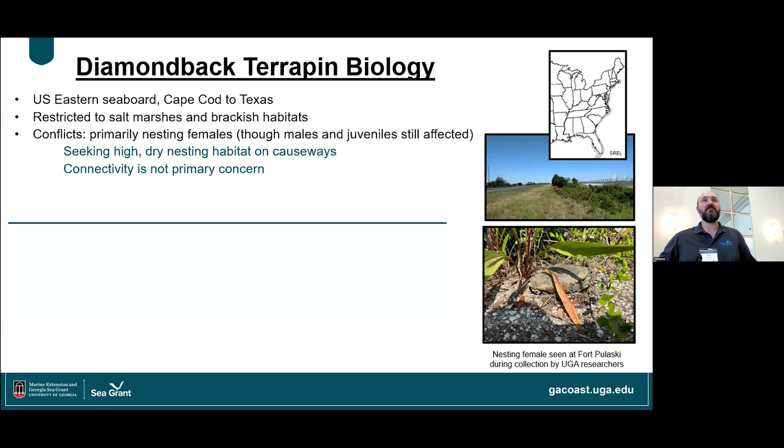So connectivity is not really the concern in this particular case. It's a case study on the Tybee Island Causeway. Because we've got bridges on either end that they can cross, it's really about coming up for nesting. And it's really just during a certain time of the season. So it just gives us a target of where we need to apply potential minimization measures, and really around that diurnal high tide, 3 hours either side of that.

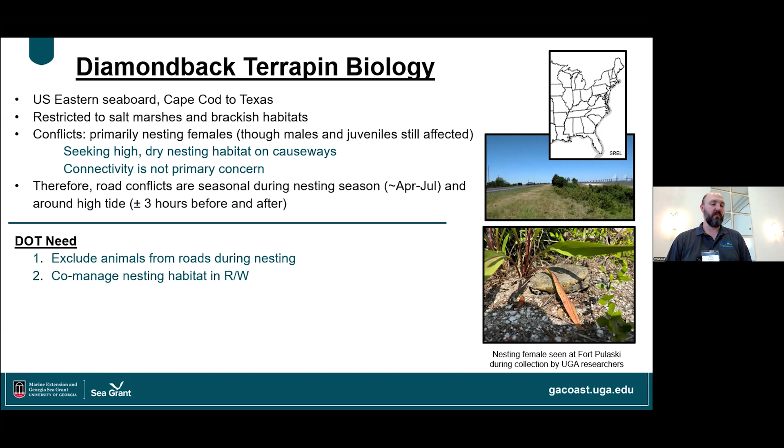So we as a DOT needed to be able to exclude those animals from the roadway, but we also didn't want to lose nesting habitat, which is really critical for that species' survival. So we were looking for a solution and looking for a specific barrier that would meet our needs.

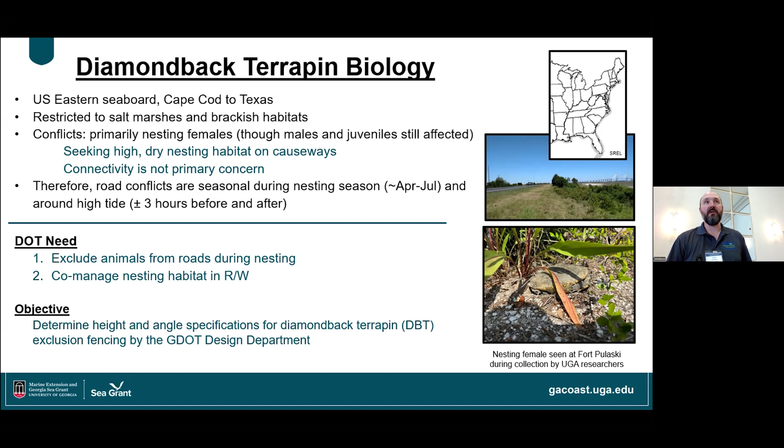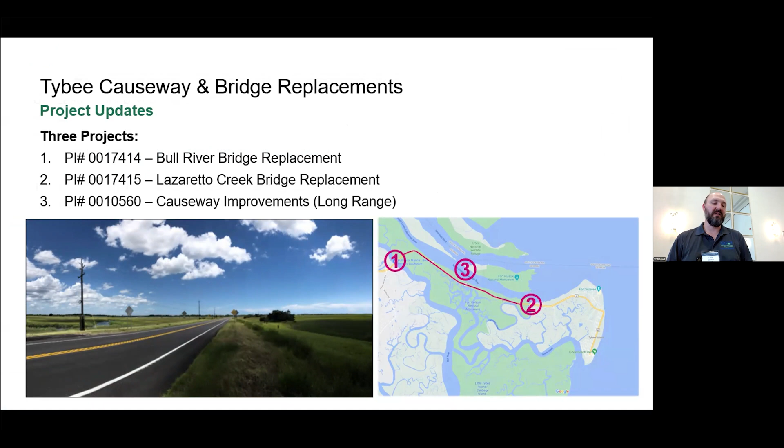There's three main projects that I mentioned. There's the causeway in the middle, but then there's a bridge on either end, and we're advancing those bridge projects right now, which is good because those are a couple of the hotspots that were identified. We had a lot of research that had been done by the Tybee Island Marine Science Center, and so we knew where some of the hotspots were, and it's really a data set that I think is over 10 years old.

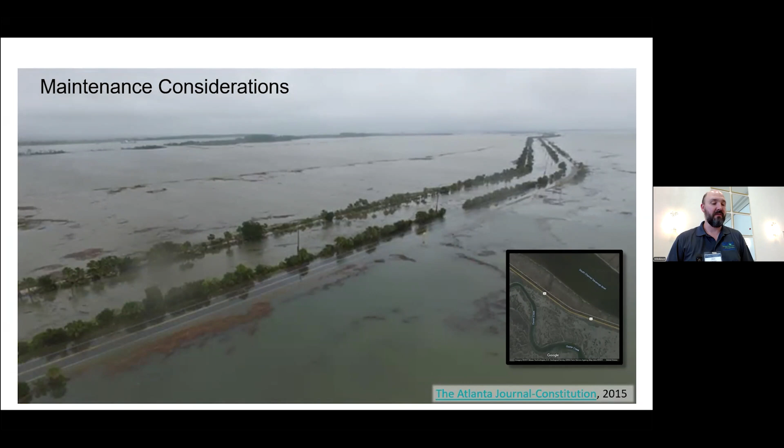There are some maintenance considerations, though. Tybee Island Causeway is very low lying, and so it floods frequently. And when you get rack from the marsh and everything up on the roads, if you had any traditional fence type, then you've got all that rack that's trapped now inside the right of way. And that was a major maintenance concern. And so they really didn't want to do that when we talked to our district office, who would be doing that maintenance, which led us to try to create another solution.

I mentioned the bridges, and so we thought, hey, could we just attach something to the guardrail? That could be great. And we talked to our design policy folks, and they said, you really can't do that because it hasn't been tested, but you can put something 4 feet behind it. And so we started looking for barriers that we could put behind it that would not have those maintenance concerns, that would meet those clear zone requirements that we had. And we also wanted to look at some other mitigation measures.

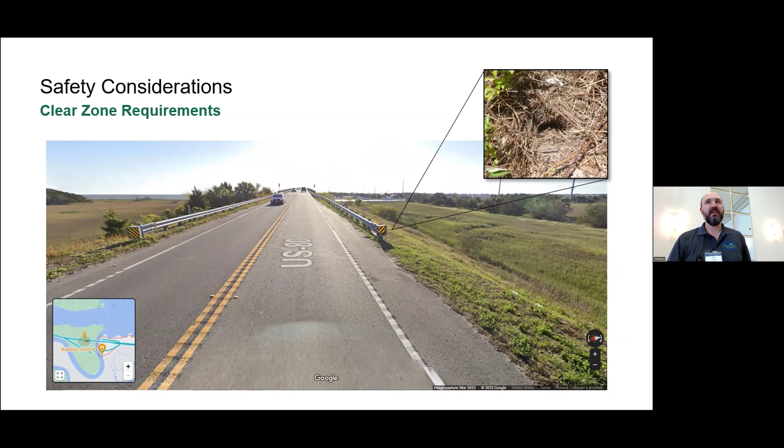So we talked about signage. There were some kind of static signs out there, and I think we've seen research that says that those are not super effective. Some other places have lights that only light up during certain times. But actually, a few years ago on the Tybee Island Causeway, we installed these changeable message signs. And so during that nesting season, a couple hours either side of that diurnal high tide, a message flashes that says, hey, turtles are on the roadway. And also, please leave space between vehicles, because often it's not the first person that's going to hit the turtle. It's going to be the one right after that.

But I talked about wanting to preserve some of that nesting habitat. With these bridge replacements, it's the only way on and off of the island. You can't really shut down the road. There's no alternative means to get out there. So we're going to be replacing those bridges adjacent to the existing bridges.

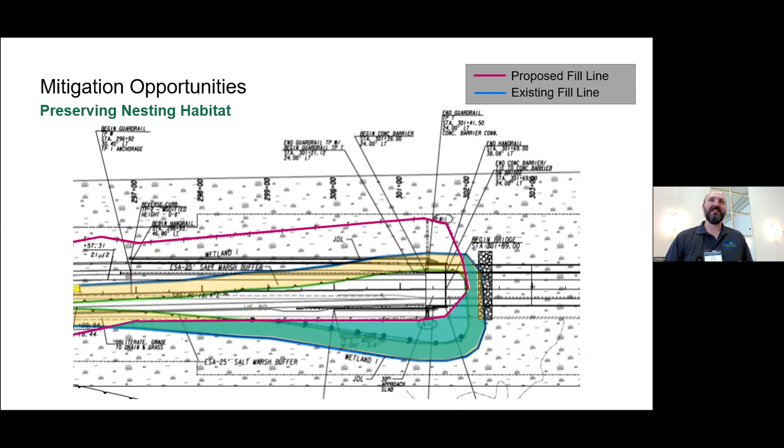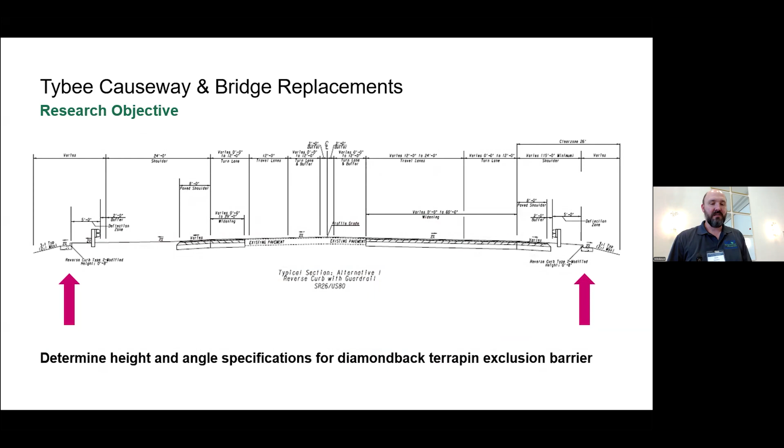And I think that's where I'm bringing you up, Kimberly. And so Kimberly is going to come up and she's going to talk about how we went through that research and some different curb designs that we tested. And by we, I mean her.

Hey, everybody. This was a fun project and a unique opportunity to actually test a design before it was put into place. I'm hoping that that becomes less and less of a unique approach. Chris and I worked together on some ideas. Some of this was pulling from the literature and some other designs from other places that you may recognize, but we were testing a 90 degree with an inward lip that was 3 inches, and then a 70-degree reverse angle curb. And you can see the sections here.

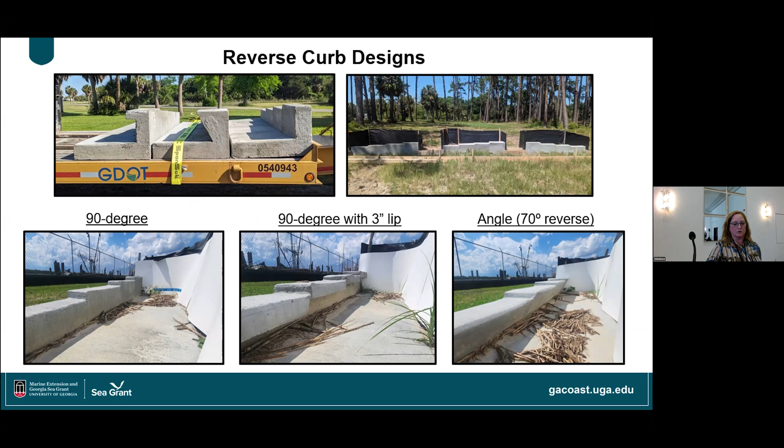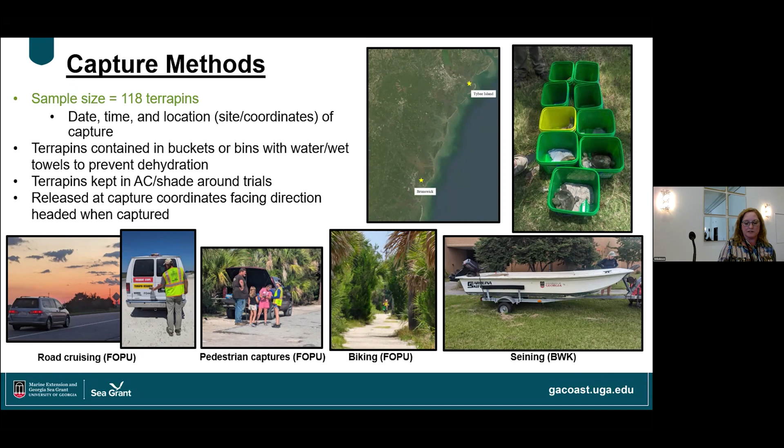We captured 118 terrapins, and we used road cruising. We did pedestrian captures, walking some of the trails around Fort Pulaski. We biked, we seined, and the general gist of this was that we wanted to catch these animals, run them through the experiment, and then have them back in the marsh and released within an hour. This is particularly important because we were capturing gravid females, since they're primarily the ones that are crawling up. We got 118 terrapins overall.

So we had 2 designations, trespass, meaning they successfully climbed over the wall, versus no trespass, where they were not able to get over the wall. We did have 2 considerations for if they trespassed, but that it was assisted. So we had an additional treatment where we added 1 inch of wrack. If they tried 3 times to get over and were not successful, we then added the 1 inch of wrack. Keep in mind that in the real world, when we get wrack wash up during some of these really high tides, it's far more than 1 inch. But we wanted to incorporate this.

Also, terrapins are incredible climbers. They're adapted to climbing over oysters and the high marsh, and so we wanted to note if they were able to use the polywall that we ended up adding to simulate an angled fence that's going to come off of these curbs. And then we randomized the order in which the different curbs and heights were tested.

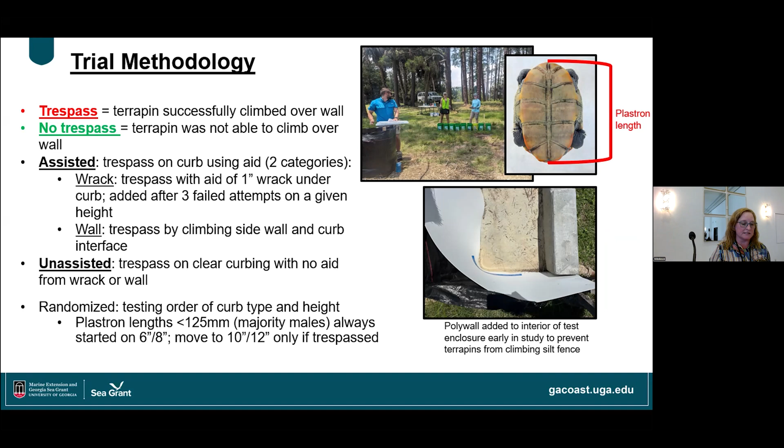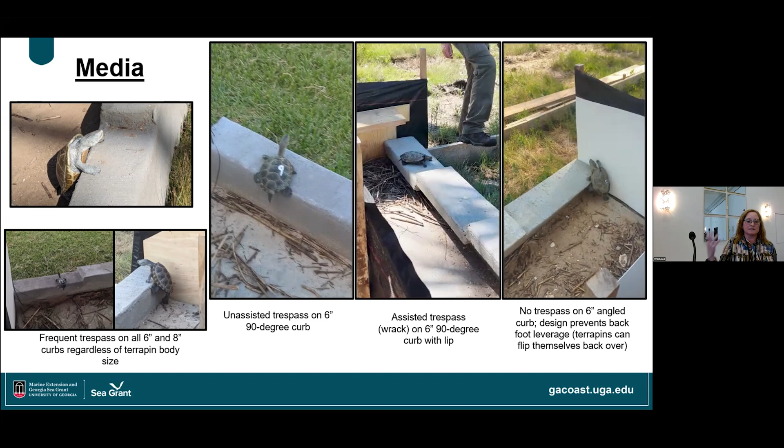Okay, so these are some examples of the video. I'm super excited that they're working so far. This is an example of a terrapin crawling over unassisted on the 6 inch. They had no problem with this. This is an example of a terrapin crawling over the lip that had some of the wrack. And then this last example is a terrapin unsuccessfully trying to climb over the angle. And I will say that terrapins can readily flip themselves over. We did not have any animals that were harmed during this.

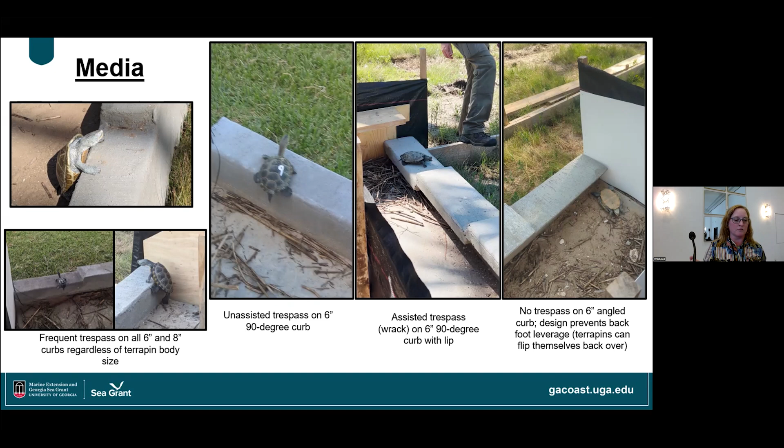And I also want to emphasize this was a test of physiology. We had a very basic runway design, and we were wanting to look at physically what could they climb over, and not trying to simulate real world behavior. All of these curbs were facing the marsh. So in some, we looked at how many attempted to climb over, because as you appreciate well, there's an energetic component there.

So with the 90, we had a lot of animals attempting to get over. With the 90 with the lip, we have fewer attempting. One of the issues with the shorter heights is that they would just go sit under the lip, and on the 6 inch, it was actually problematic for the females because they were tall enough that it was a problem to wedge themselves under. The 70-degree angle, we simply had fewer animals, especially at the higher heights, that were even trying to climb the fence.

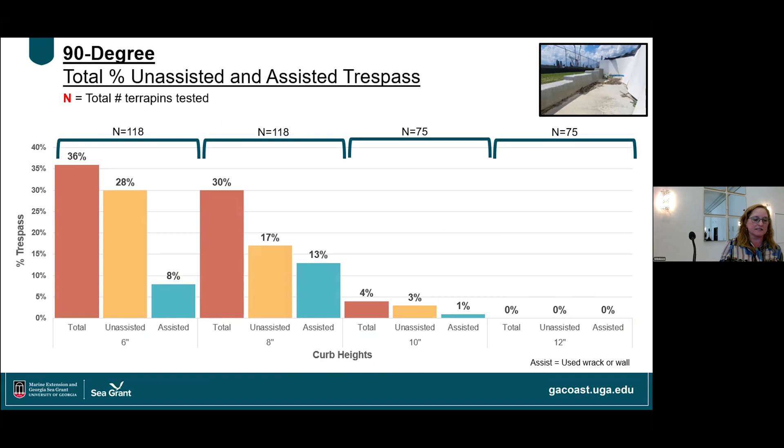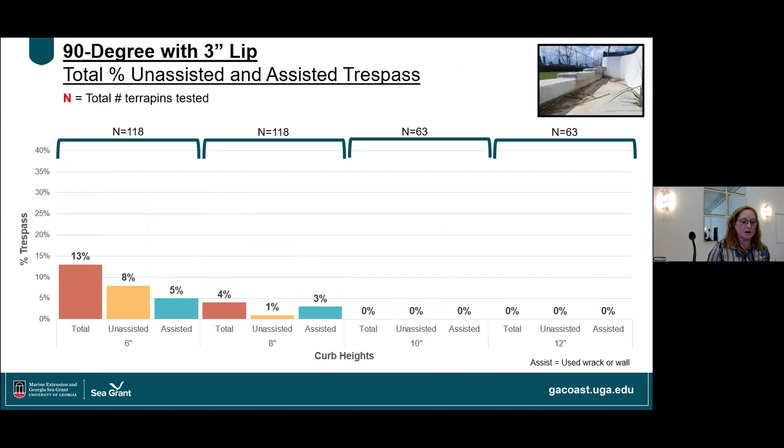So then I'm going to give you breakdowns specific to each one of the curb types. And again, no rocket science here. You can see that the 12-inch curb was the most successful, and we had quite a bit of trespass on the 6 and 8 inch. Again, just a straight 90 degree. The 90 degree with a lip, we had considerably fewer instances of trespass, and we saw high degrees of success with 10 and 12 inch lips.

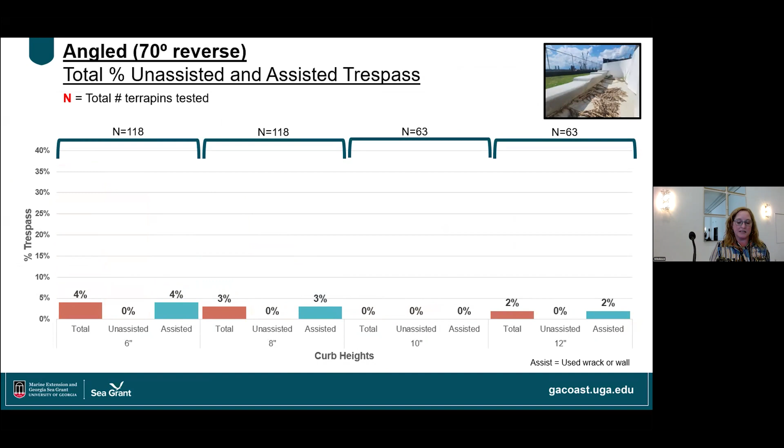And then Chris and I also put this graph together because we wanted to look at where they had assisted trespass. Were they using the wrack versus the wall? So this was part of our internal presentation back to Georgia Department of Transportation, because these are two different issues to think about, right? If it's a wall trespass, that's a design factor, and using things like curving rather than 90 degrees or hard angles coming off can assist that, versus wrack, which is a conversation we need to be having with the maintenance department of how frequently do we need to keep these wrack areas clear.

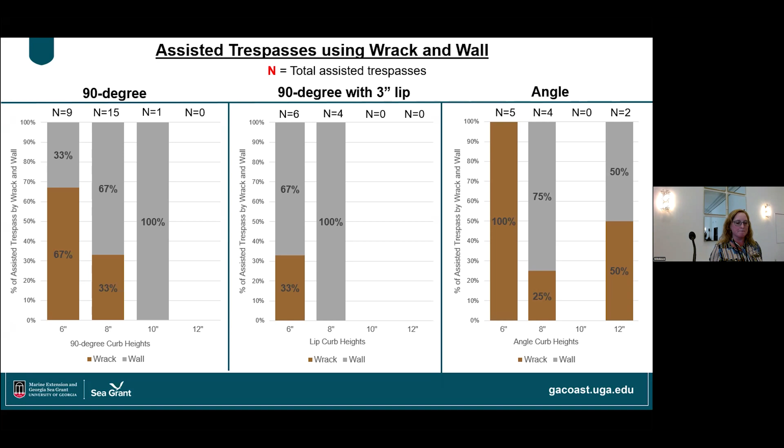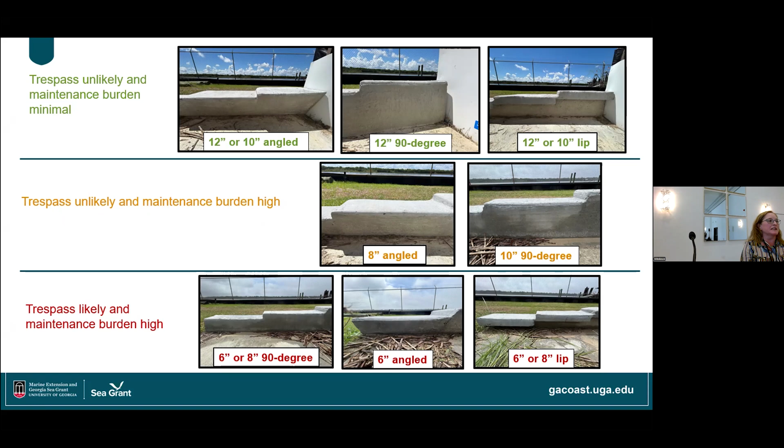So in summary, we broke this down. Our recommendations were based on the likelihood of trespass relative to the maintenance burden. And so some of these conversations are ongoing. There's actually a patent process. We conducted the experiments through UGA, and just wanting to make sure that Georgia Department of Transportation has the rights to use any of these curbs. Ultimately, our recommendations were for a higher curb and that 70 degree inward facing angle.